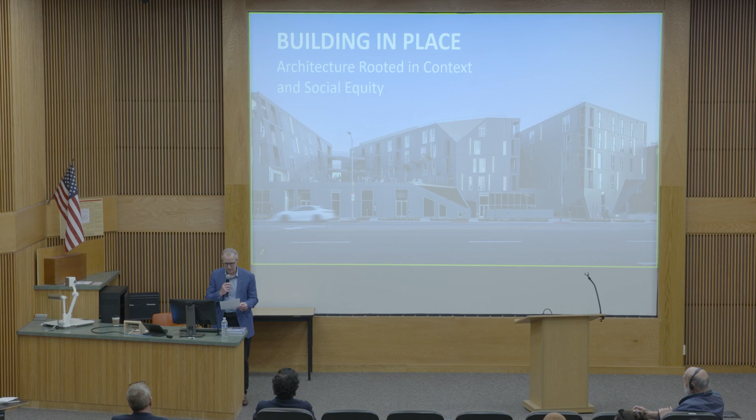We can talk about the firm's many accolades and design awards, including being ranked number one design firm of the country by Architect Magazine's Architect 50, and Lorcan's the founding principal of LOHA, and named AIA Los Angeles Gold Medal recipient. So these public notices are evidence of something much more meaningful in the work of Lorcan and the firm. In the firm's recent book that I just showed, titled Building in Place, Architecture Rooted in Context and Social Equity, the book's introduction explains the firm's approach.

I really like this excerpt, so I'm going to read it. Architecture is telling a story. It is about specific lives and specific places, the exact location where people work and play and carry out their daily routines, whether uplifting and inspiring or enervating and mind-numbing.

The stories - this is my editorial comment - and the work of the firm, is about redlining in South Los Angeles, and the continuous renewal in the cultural and artistic melting pot of Silver Lake. They are about embracing the pessimism and economic struggles of Brush Park, in the collapsed ruins of Detroit. They are about implanting something brand new, housing for the unhoused, on a railway median, beneath one of the world's largest freeway overpasses, where there was no hope of life before. They are about percolating waters of a timeless American Indian oasis, hiding in the rush hour streets of a blithely unknowing metropolis.

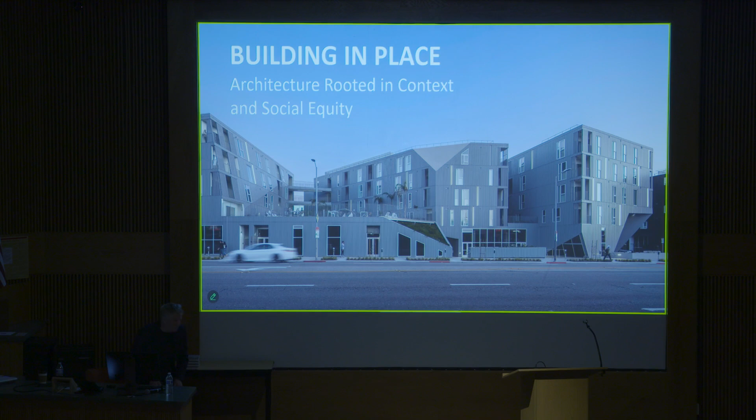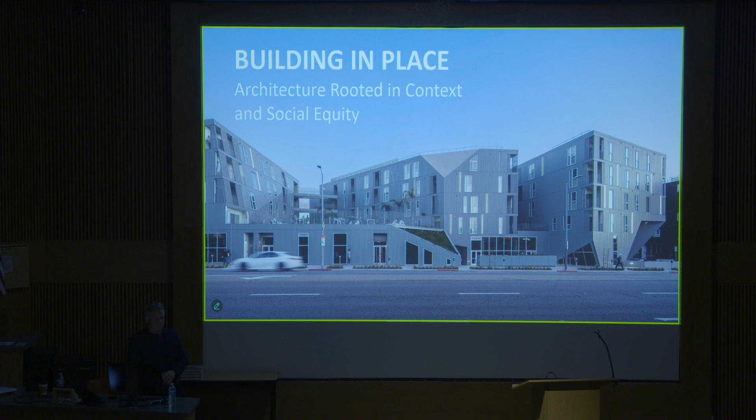You mentioned a very good point about the nature and the importance of housing as a pedagogical strategy. As an architect, one wants to think of why, or the philosophy behind what you do. My background is that I studied undergrad in California, and I went to London to the AA to get my master's degree. It's interesting, wherever you go in this world, if you look at the history of architecture, certainly in Europe, housing is how one defines cities. And when they try to understand the DNA of cities, they look at housing. Thus Corbu, among others, in the early years, and Hilberseimer and all these wonderful architects from Europe were defining what cities were. It's something I think the US is going to get to as well.

To me, it means a lot to be involved with housing to the degree that I am. We as a practice are about 25 of us. It's a team, and I'm honored to have great core people in my practice. My role right now is to continue to carry the DNA of what we've done over the years, and to see architecture as a culture of redefining how people should live. I'm convinced and committed to the culture of people.

Part of my background is at I. M. Pei & Partners and Steven Holl's, among others, which is where I spent my internships, well, I'm sure all of you students will end up spending places as well in the future. Certainly not I. M. Pei, forgive me, but others. That experience meant a lot to me, and it was learning from those architects.

But one thing that resonates with me is having worked on the Louvre Museum for 4 years, and certainly with Steven Holl, worked with cultural projects, I always thought I was fated to get involved with cultural projects as a practitioner. Ultimately it found its way into housing, and I've recognized the value of the culture of people, and that is what housing is about. It's about those who live in it.

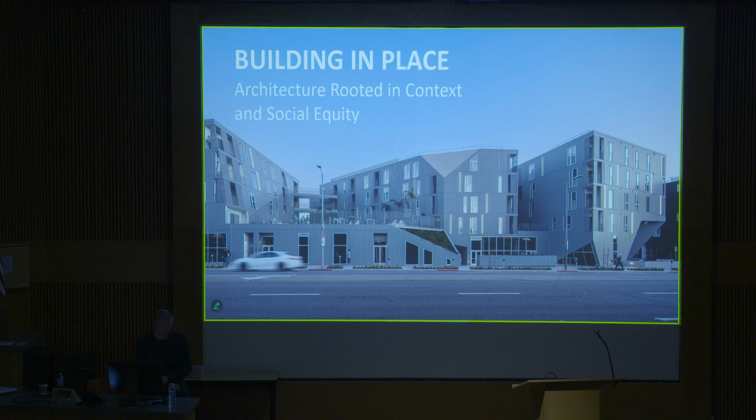That's very important. So today we're just going to present projects from my new book by Rizzoli, Building in Place: Architecture Rooted in Context and Social Equity. What the book does, and what my firm does, is draw out impact solutions and strategies which demonstrate our commitment to artistry, social equity, and context, in the hope that we can elevate the human condition. Those are all critical points. It's about context, it's about understanding where it is, and that's extremely important in terms of all the work that we do.

Just from early part of this lecture, I want to explain what the title means to me. Building in Place, the title of the book, reflects on the work in the new volume.

There's an intentional double entendre here. If you take the word building as a verb, as in to construct an edifice, to fabricate from scratch, to raise something from the ground up, all these represent that term building. It also refers to the noun, as in building, a structure.

Place, too, has multiple meanings, as in to put something somewhere, such as to place an object on a table or a building on a plot of land. Then there's another meaning, as in some place, somewhere, a specific location, with a deeper, subtle connotation, implying a spot with a very specific history, culture, identity, tone, vibe—call it what you will—but alive with the beat of its own existence.

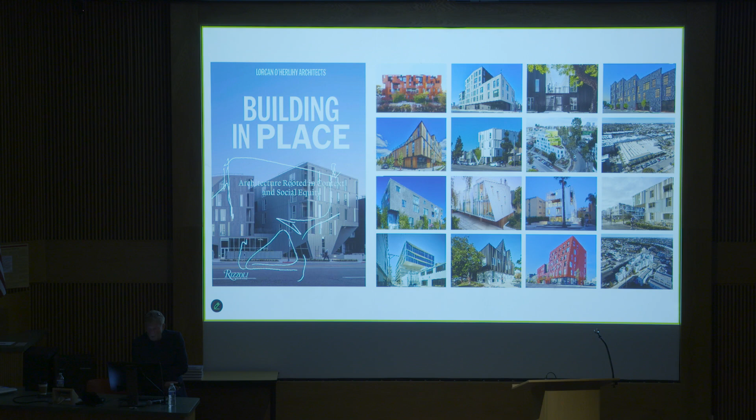And that's what the book is about. It's about both context and place, and also about this thing that we do, which is producing architecture. We build in place. When we're fortunate and successful, architecture evolves, and that's what drives our work. The title was something that meant a lot to me; that was the premise behind Building in Place.

I'm going to share with you four housing projects, two of which are supportive housing, one a co-living project, and in addition, a dance school. I wanted to show that last project too, because it shows that all the ideas we develop in these housing typologies can also be transitioned to other types of projects and typologies, such as a dance school.

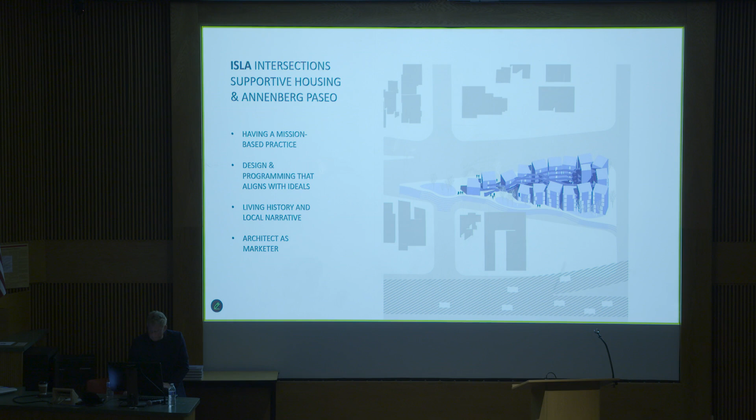Isla Intersections Supportive Housing and Annenberg Paseo is a project in South Los Angeles. This embodies what I mean when I say living histories of a site. It is very site-specific, this project, and there's a critical story behind it.

It's a median between two roads, as you can see right here. This is the site, located between Broadway and Athens Way. These were two roads that had existed, and this was a shortcut to get onto the freeway—the confluence of the 110 and 105 freeways in Los Angeles, which is the busiest confluence of two freeways in the United States.

So one can well imagine, not a site to do housing. Los Angeles is struggling, needless to say, with providing sites for housing. The land value has gone through the roof, so these types of projects and sites are the only ones remaining right now. What are these leftover spaces, whether it's a median in a wedge shape or other types of medians?

How it works is the city provides the land for 99 years for $1. Thus, the land is free.

The second critical aspect of this project, which always undermines other types of supportive housing projects, is the need for parking. What's wonderful about this project was that parking was not required—that was built into the request for qualifications for those who chose to pursue it. That saves $2 to $3 million, due to the cost of a concrete structure for parking, then putting housing above it with the required 3-hour fire rating. That's $2 to $3 million off the table, which is wonderful.

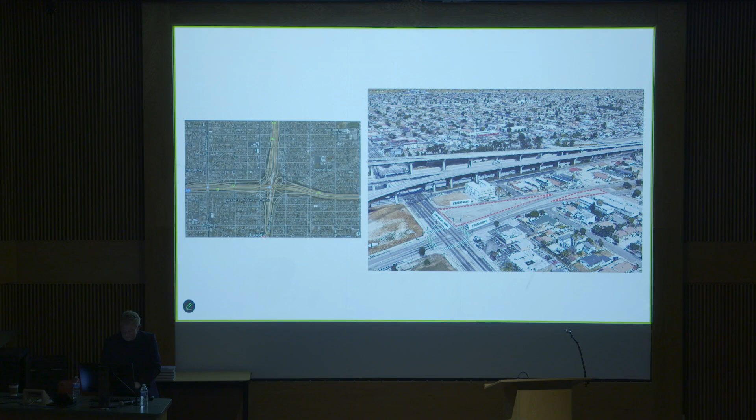It is organized along the spine of Broadway Street as a series of 16 staggered containers, boxes, connected by a series of walkways to create a single unified building. So here you can begin to see that represents the floor plan. This is the site, and then there's the circulation right down the middle. So those are the big ideas behind it.

The programming includes gardens, space for the farmer's market, a small lab for startup testing, the making and selling of goods. Programming was also critical in terms of healthy eating, so we provide an urban farm on the site as well. A big challenge was we had to design it in a very compact and efficient way for each of these containers. The open plan certainly allowed for the idea of a kitchen, bathroom, bedroom as an open plan. So that was one of the key issues there.

There's an axonometric, so it was connected by a series of walkways to create a single unified building, intentionally scattered along the inside. Here you begin to see we designed it with this idea of circulation and exterior access. This was crucial as well in terms of providing passive design strategies. Can people enter from outside? Certainly you can in Los Angeles. So that represented a very important aspect of the design.

Equally, we did provide rooftop farms. All this is part of the urban farm. Community terraces. This particular road, called Athens Way, a secondary street in Los Angeles, was vacated. It became, in a sense, a pocket park. So this became the front lawn for the tenants who live in the building, but also was open to the community. So this is an open park now, which has been finished for about a year. So all the landscaping is growing.

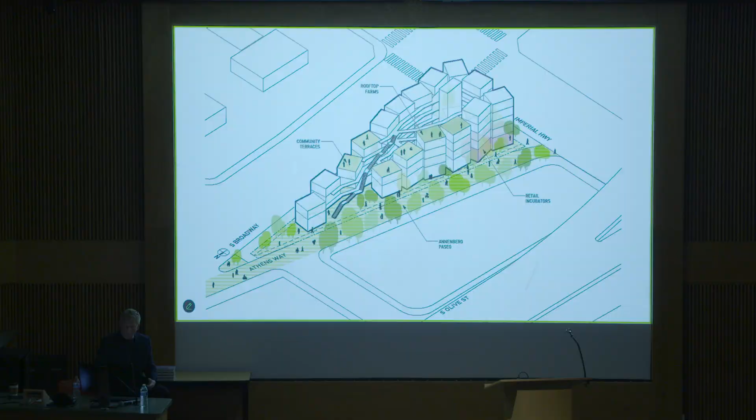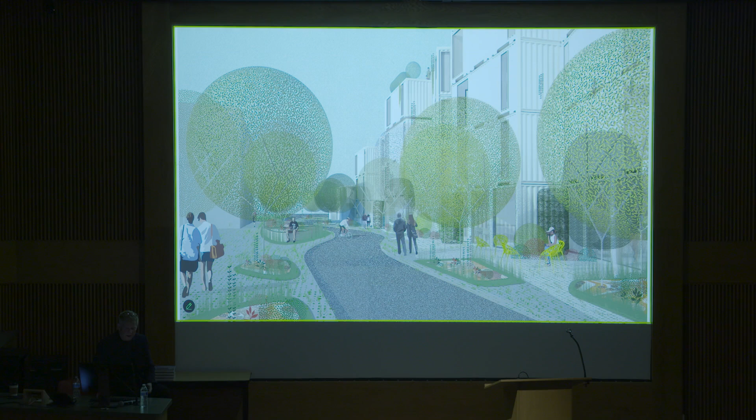Ideally, we'll have more and more electric cars, and ideally the toxins will be reduced both in terms of health and also in terms of sound. That's our hope. There's an early rendering of the project. And there's, again, the development of the paseo, which was a very important aspect because you see it's no longer a road. It's essentially a bicycle path, which is also about establishing a new culture in Los Angeles to reduce the need for cars and begin to recognize other ways of transportation.

This is the context, and this is what we were dealing with in terms of adjacencies, as you can see. Culture of Los Angeles, as they say.

This represents, of course, the big idea behind working with containers: as we go through design and approvals, we can start at the factory to fabricate the units while we're doing the grading, preparation, and foundations. So all this is going on while we're building it. Then they ship the containers and install them. Clearly it took longer than 3 days, but in the end, this is the premise behind it.

So we were able to do it in about 12 days to bring all the containers, and then it took a number of months to zip it up, and then the landscaping was certainly added to it. The premise behind it was we would save over a year between all the fabrication during this period. It turned out to be more like 7 months rather than a year. But while we're doing all that, we saved time, and time is money. So that was the idea behind it.

So it is, in principle, meant to save time. And as I said, it's an opportunity that one should grab.

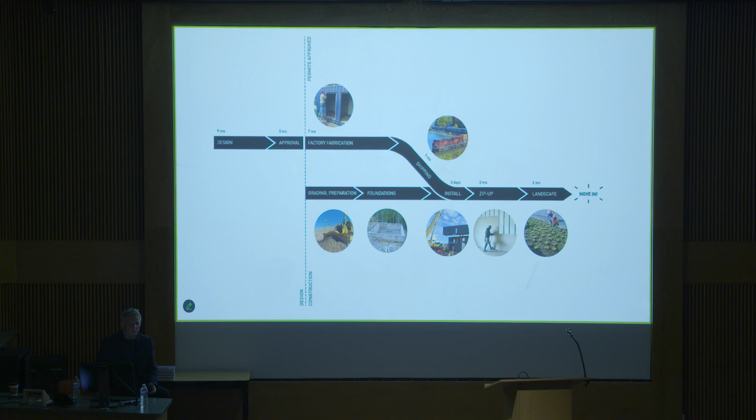Having done it, I'm not convinced it really works. There are some of these container vendors - this was with giant containers, and there's other ones called plant prefab. They take much longer than they say they're going to take, so you don't have the value of saving time. That's something we learned having done it. It sounds great, sounds noble, but it's very difficult to pull off.

So here are the containers being brought to the site. What's interesting also is the containers that worked on the site, because it's very difficult to have a staging ground. We had it right in between two streets, a very busy area and a confluence of freeways and an urban site. So it made sense to build it in a factory, so there wasn't the complexities of building on site.

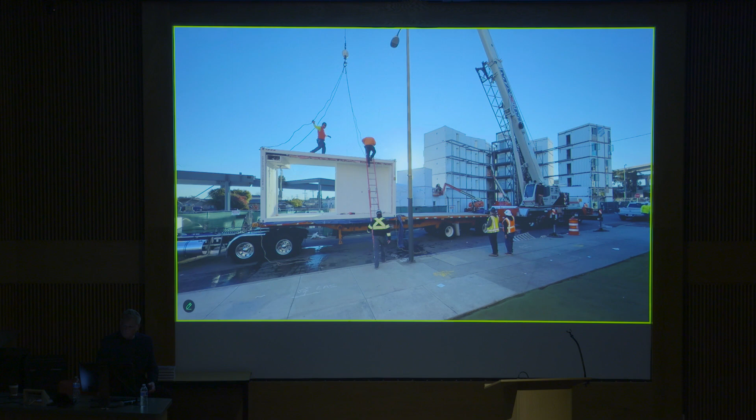Given the political aspects of it, it was nice that the city council person was committed to the idea. What's interesting is that when it was completed, there was a very important moment where the city embraced it - there was a grand opening after it was opened. It was wonderful to see the community come out and see the project, providing 54 units for supportive housing for those who are on the street, the unhoused. I'm very happy to say that's fully leased, and they're very happy to be there.

This, I think, is the future for Los Angeles. The land value is so much that they have to find these pockets of leftover spaces in the city and utilize those spaces to be able to provide housing as needed. There are over 67,000 unhoused in the streets of the County of Los Angeles right now.

There's a bird's eye view of the project, as you can see. The Paseo really celebrates this idea of a front lawn, so to speak, which embraces a new culture - which I do think is important in Los Angeles - to get away from the culture of the car and embrace the idea of bicycles and walking. So that plays a big role.

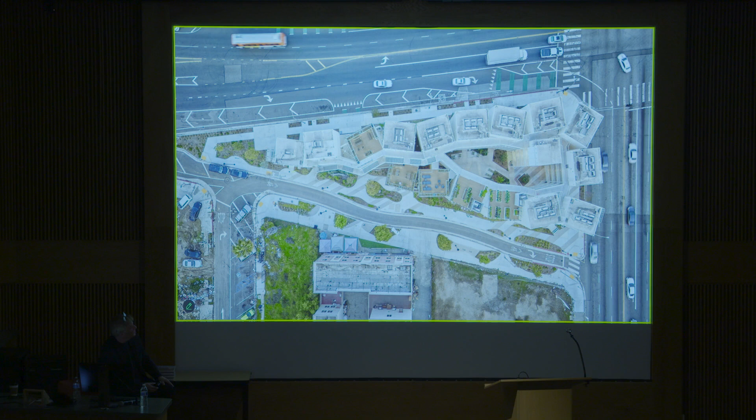I quite like this picture because it shows the intensity of this urban condition where the streets - you can see the cars, you can see the kind of distressed buildings around it. We do think this is going to represent a catalyst for change in the area. This was a no-go zone. There was a food desert - there was no food there, nothing was there. So for us to be able to build this and provide 54 units, it meant a lot to us.

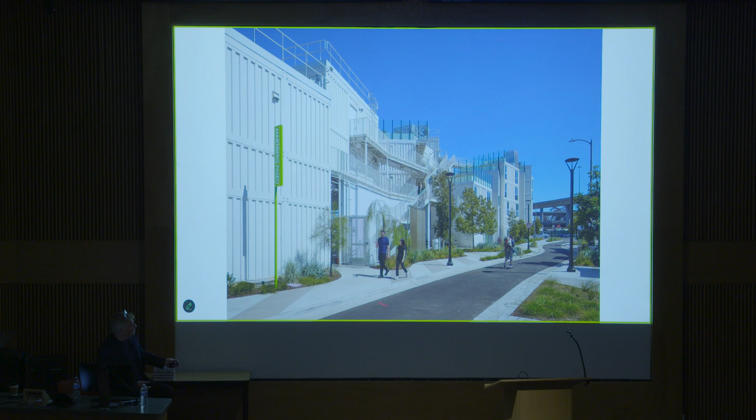You begin to see the trees being planted - these will grow to be 35 feet tall. This is the wonderful area that is now their front lawn. As you go up in the building, as I mentioned, the circulation is in the central spine, and these are the outdoor spaces. We're activating each roof as an outdoor area to sit. For those who've spent multiple years on the streets, they really enjoy having these spaces to go in and hang out.

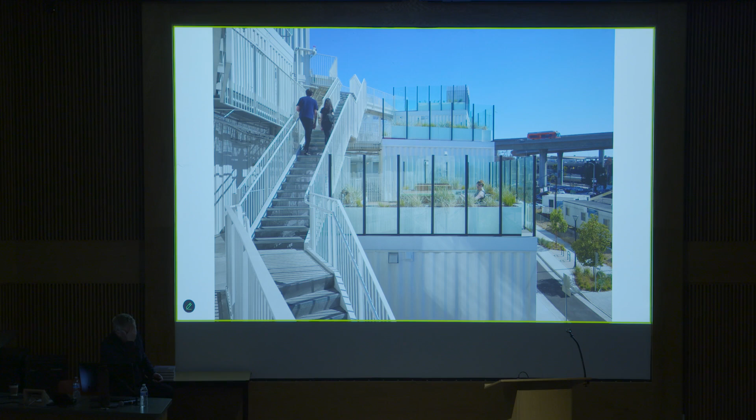On the roof, we have the urban farm, as I mentioned. This has been run by an urban farm company, and they come in and maintain it, making sure the food is done well - all the vegetables and fruit planted here. This is for the people in the building, but also on weekends they can sell it at the farmer's market, and that's what the Paseo will be used for. There's the courtyard view of it there. So it's really about the ecology of where it's located.

This particular project was in a very, very challenged area, so we wanted to give them the opportunity to have some privacy and security in a courtyard. All the individuals who live in the units have an individual way of joining their units and the entry doors, yet you can see the intimacy of a courtyard down below. So there's an opportunity for them to start this process of re-engaging society by having to recognize your neighbor, and that's awfully important to providing this experience for them.

I'm often asked about container buildings. Do they look like a container inside? No, they don't. You have to create a conditioned space, with insulation, and make sure it's a comfortable place to live.

So these are very small areas. They're 420 square feet, forgive me, more than that. The 3 containers are 8 by 20, which is 160 square feet each, times 3, which is 480. So 3 containers represent 1 unit, each 480 square feet, and that represents a room for a kitchen.

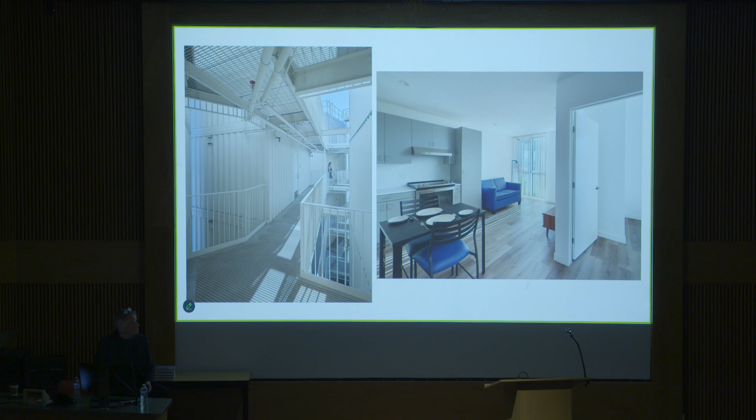Here are all the container towers. As I mentioned, this is 3 containers representing 480 square feet.

On the ground level here, they were startup companies, we call them incubators. Each one of these are organizations that live in South Los Angeles, one is the food resources area, another is job training. It's very specific to those in the building, both an incubator and also the idea of health is very important. So both food and social services, very important.

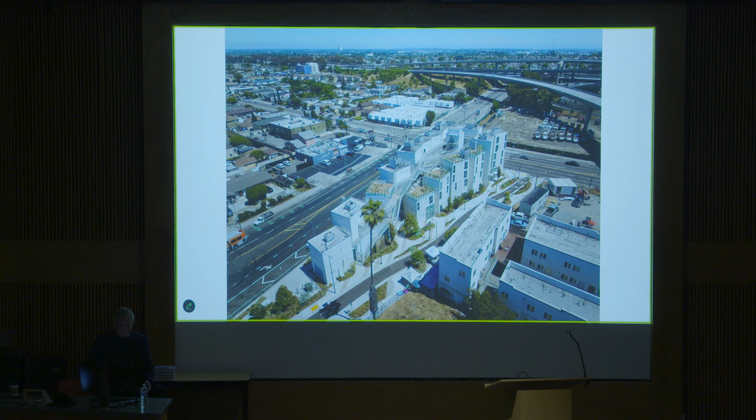And there's a view on the busy streets, that's Imperial. Again, compositionally, architecturally, the idea was to take a conventional container building—they tend to be stacked right next to each other, all about efficiency—but no, you can actually be playful with it. So what we ended up doing is playing with the geometries and shifting the axes of each of the container volumes.

It was twofold. One was, if you shift the geometry of a building, the sound from the freeway, which is critical, bounces off differently than if you had a flat wall. So we didn't want a flush condition facade because the sound was going to echo. But if you peel it apart and provide air spaces in between, it absorbs some of the sound so it's not as loud. It was really interesting to use noise as a kind of catalyst for the actual massing of the building.

And that's what I believe in. When you're doing projects as an architect, you look for opportunities to produce good architecture, good ideas, and it sometimes comes from that. It's about sitting down with your noise consultant, and he says, well, we shouldn't have a flat wall. Ideal, wonderful, like it. Let's shift the geometries. So that to me is the way that good architecture comes out of it.

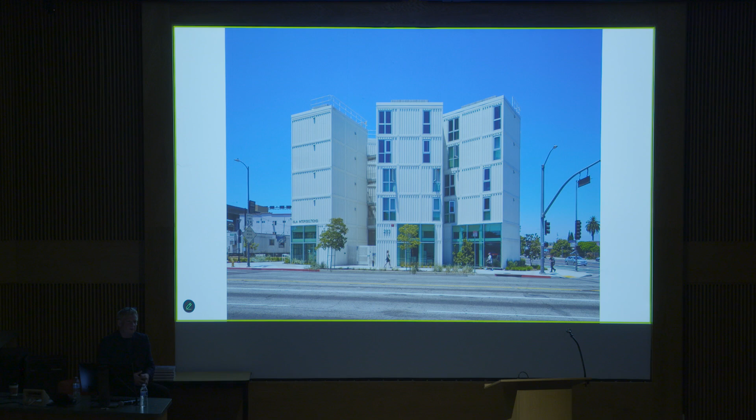And there's the main street. As you can see, each building is shifted, or a tower, and you can see the light filtering through to the courtyard.

Contextually, you can see it fits there. It's near the freeway, it's industrial, it's urban, and the building can be representative that way. We like the color white because light bounces off it differently than other colors, and it's also optimistic.

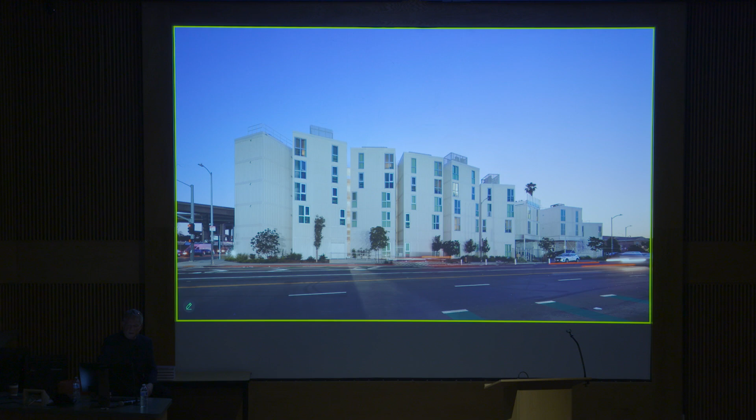So that's called ISLA Intersections. We finished it about 10 months ago to a year ago. The next project is also supportive housing, and this is called MLK 1101.

So it brings 26 units of permanent supportive housing to formerly homeless veterans and chronically homeless families. This building has 26 units, but has 3 bedrooms, because at this particular time, 6 or 7 years ago, there were quite a few families on the streets of Los Angeles. The breadwinner, perhaps the husband or the wife, lost their job, and then they eventually found themselves in a car and then ultimately on the street. But they were family, so this building was for them.

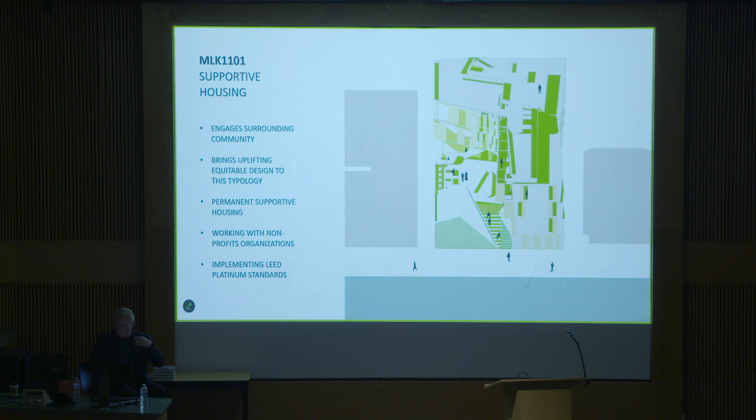Out of the 26 units, over 22 were 3-bedroom, for families that were on the street. That was one of the critical things. Equally so, they were veteran families as well. So those are the things that drove it in terms of the programming.

As I mentioned, at present there are close to 70,000 people experiencing homelessness in the streets of Los Angeles. And given the need for housing in Los Angeles, now we have another 10 or 15,000 people who lost their homes in the fires, the Palisades fire and the Altadena fire, this is even more critical to be able to provide housing for all.

There were a number of people in those fires in areas that were nice, but they were houses built in the 1940s and 50s. It had been in their families for many, many years. They don't have the resources to rebuild. They're going to need to move elsewhere because of the drama and the sense of fear they have about being able to rebuild where they were. So this idea that housing is so essential is even more true now.

It's also located in South Los Angeles, needless to say, one of the city's poorest neighborhoods, where 33% of the population has an income below the poverty line. That's the market we're dealing with, that's the critical thing we're dealing with, and a college graduation rate of 4%.

So you can see these are areas that need work of consequence produced. It was a vacant, unimproved lot, typical to most parts of the city of LA, next to a McDonald's, a strip mall, and a hodgepodge of rundown 2-story structures, as you can see.

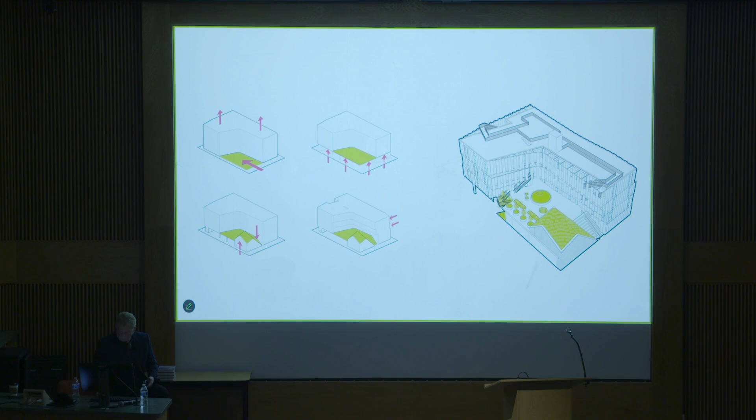So you can see that section. It speaks volumes of what we're doing in our building, carving out these strategic voids, providing light, air, and circulation, activating them - all those aspects, which I spoke briefly about earlier to some students. That produces good architecture, gives you opportunities to work with the massing and produce architecturally interesting forms as well, if it's driven by ideas like this.

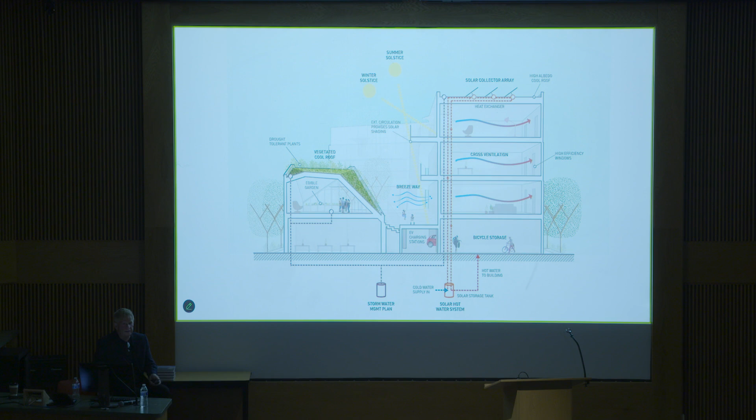And that was an interesting moment because one of the state federal funding sources we had requested asked, can we do a green roof? And we said, absolutely. All those things came from actually the vendors who are the funding sources. So it's quite interesting that even as they're providing the funding, there are mandates that come with it. We'll give you $1.5 million towards this building, but we'd like to have a sustainable component to it. Can we do a vegetated roof? And we said, absolutely.

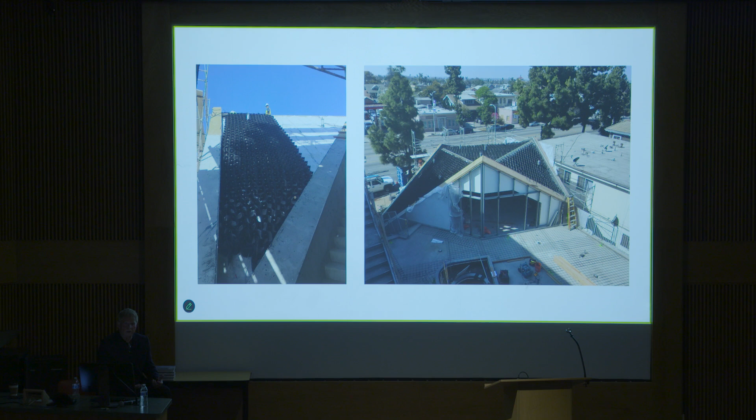So architecture is a collective way of assembling ideas, and they come from everywhere. And if you just listen, you can hear them. And it produces better work. More construction shots, and there's the completed work.

So this is the main axis down the center. We did produce a moment here, which is called a stoop, meaning we pushed the security gate, which you do have to have, up to the end here. We didn't put it down here on the street.

Thus, if you're on the street and you don't have a place to live, and you're homeless, you can come up here and sit during the day. It's open 24 hours a day. So it's a generosity of the building saying this is for you as well. And that goes a long way in terms of respect for the building. There was no vandalism. There's no graffiti.

That one gesture, in a sense, proved to the community, which is a distressed area, that we're going to give you this - in return, let's respect our neighbors. And thus there was not a conflict in the building. Everyone seems to be enjoying it.

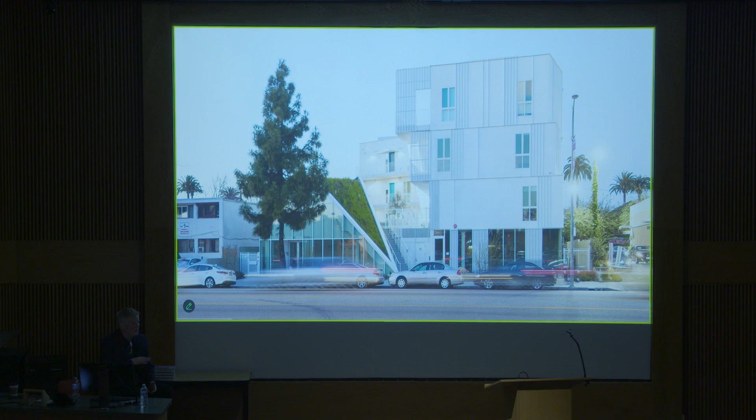It's called permanent supportive housing. And the most important word is permanent, meaning if you have the opportunity to move in here, you can stay here for the rest of your life if you stick to the rules: see your social service representative, no drugs or alcohol, and be kind to your neighbors. If you do those three, you can stay there indefinitely - thus the term permanent supportive housing.

Circulation on all three levels, you access from the exterior. Shading, where we were able to provide shading at the top. But also the materiality of this project is a hybrid between metal exterior and cement board, which was a requirement by one of the funding sources. They wanted multiple materials. We did that, but we kept the building all white. We didn't want to have this hodgepodge of different materials that somehow break up the scale, which is what they did it for. I was convinced that you don't need to do that. You can change the material but have a clarity of an idea. Thus the overall idea of the white building, which to me represents optimism.

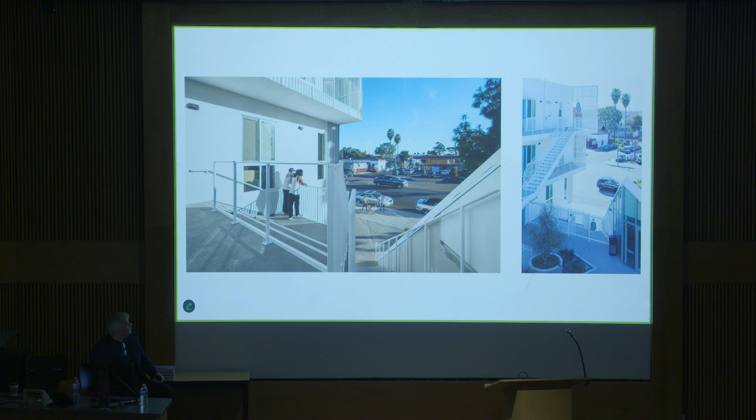And there's the stoop right there.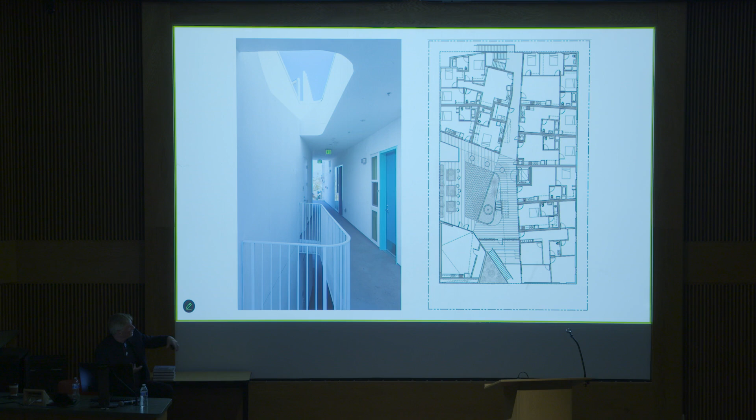Here's a typical plan. You come up the stairs, and at each level you can see the bedrooms. Here's a smaller one-bedroom unit, here's a three-bedroom with one, two, three rooms, and here's another with one, two... sorry, that looks to be two bedrooms—three bedrooms, forgive me. You can see they were able to stitch and weave the three bedrooms around the courtyard.

View from the walkway above, looking down. And then again, a typical unit—this one we flush the windows at the ground, and we also have 9-foot, 6-inch ceilings. Again, simple, not big budgets.

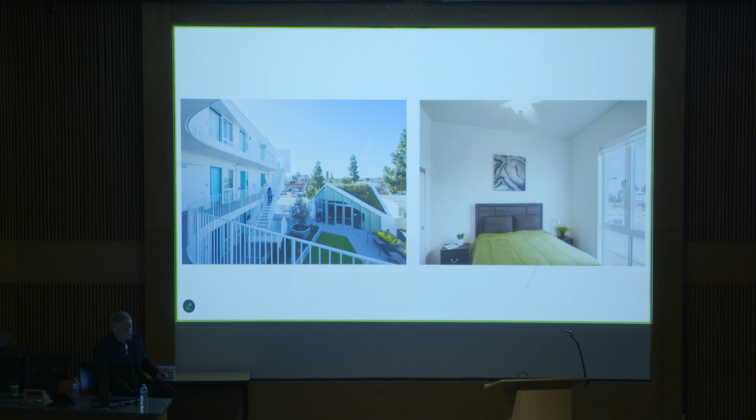That's part of the thing about architecture—you can use architecture to make lives better, meaning that if they can begin to assimilate in culture again and be able to engage and communicate with people, the better.

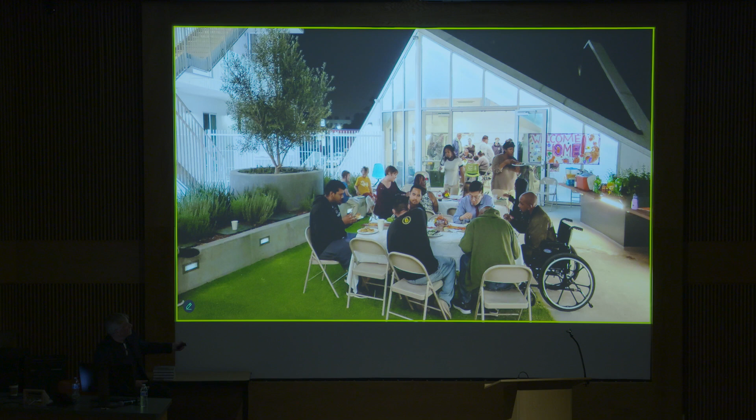This represents how active this courtyard is. We've also done an urban farm here, with vegetables being grown right there. And this is the multi-purpose space—a community room, kitchen, among other things. There's a bird's eye view of the outdoor living room.

You can see you can produce and bring architecture to supportive housing—there isn't a mandate that it has to be lacking of that. Early on in our career with these projects, you'd have that condition where the client would say, look, we just want to provide homes. We don't care about the architecture. We don't care if it's uplifting. Just make sure they have shelter.

Our position is, well, it's also about their health. And their health is to have uplifting spaces.

I believe that passive design strategy is critical. Thus, we had all the exterior access to these. There was a moment in this project where they said, why can't we just have a box with a double-loaded corridor down the middle, because that's a conditioned space? But that's not a very pleasant world when you have hallways in the middle of housing. If you can pull the housing, or the circulation, to the outside and have access from the exterior, that works—and certainly can with the climate in Los Angeles.

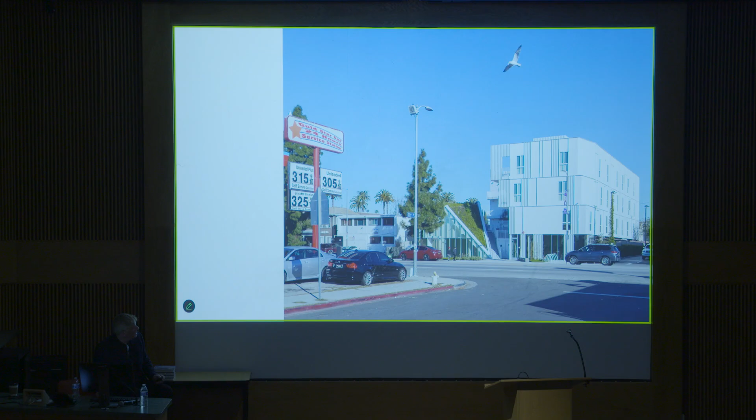A view of the street. I like this also because you can see there was, once upon a time, gas priced at that number. But you can begin to see how the entry has this opportunity, this optimism of the street. This building certainly elevates the architecture of the street compared to the conventional buildings on the rest of the block. And there's USC over there—you can see the Coliseum.

The next one is market rate—a project I did about 15 years ago. It still represents an important moment in our career, a bit of a tipping point. It's called Formosa 1140. Again, the big idea was providing green space and density simultaneously—can you produce green space and housing on the same site? This was critical because it was a public-private partnership, a weaving of both the City of West Hollywood and our private developer, Archetype, the development company.

The third idea was really looking at amplified urbanism—can you produce architecture that's not only producing housing, but also brings a pocket park to the same property? A very unusual concept. I'll briefly explain the background: it's in West Hollywood, a very interesting, progressive city with a very dense horizontal density. Most of the work is 3-to-4-story apartment buildings with smaller houses tucked throughout the city. LA is notorious for lacking public space, so the principal idea behind this project was to radically rethink that convention.

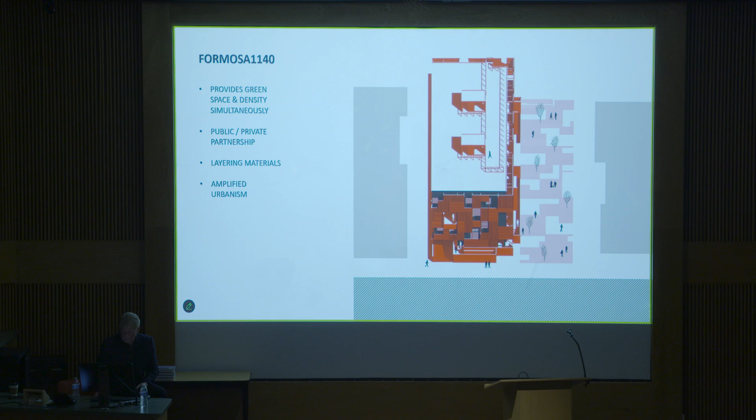Well, it couldn't work. So we came back to them and said, what if we provide a pocket park for the city that anyone can use from 7 a.m. to sundown? They bought the idea, and said okay, you can get rid of the house, build your 11 units, and we can actually provide $500,000 to do the park.

So in a sense, we are trying to rethink the convention of the courtyard housing you see throughout Los Angeles and elsewhere. There's your conventional courtyard housing. Thus, the courtyard housing block infill ends up like this, where all the common open space is only for those in the building.

But what if you were to do a modified courtyard strategy, an extroverted concept, where instead of enclosed common open spaces, you push the volume to one side and provide a pocket park, overlaying the common open space requirements of housing with a public park for the community? And that's what we're able to do.

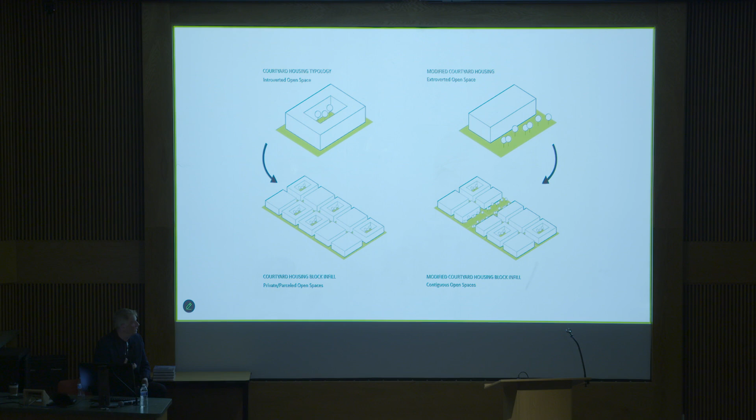You don't have to stick with the urban strategy, the urban grid, all predicated by cars. What if you were to rethink the city for the person, for people to walk? That was the premise behind it.

So here's the big building. In terms of efficiency, all the units are identical—there's 10 units here, this one's a little different on the corner—and then here's your pocket park. So this is one property, but it's a public park and private land. And there's the section, meaning there's your park, the parking tucked underneath the park, and there's your building right there. That's an interesting concept of public-private.

This, in effect, is also a property line between the public and the private. So as a vertical section, you have private parking underneath for the tenants, and a public park on top of it.

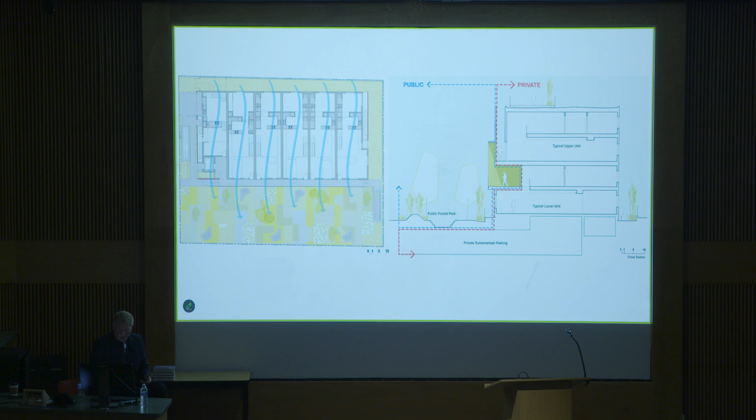There has to be an alternative approach right now. With climate change and the intensity of the winds and fires, which are tenfold compared to 20, 30 years ago, they are wiping out cities. There are war zones in Los Angeles right now, in Altadena, Palisades, and elsewhere, and this will continue—in 2 to 3 months the same thing will happen, and 3 to 6 months after that, another scenario will happen. This idea of repeated disasters is going to keep coming.

So there is a way that individuals like architects, working with clients, can produce fire-resistant houses. That means wood may not be on the table anymore, because, by Lord, that is fuel for the fire.

Equally so, the state and local government have to engage, and the infrastructure also has to address it. They have to recognize that between the brush, which surrounds all of Los Angeles, and where all the houses are, that's the edge condition—there has to be a firewall. They have to produce a really robust, accurate way of handling that, and they have to have infrastructure in place to mitigate these fires when they start, because once it takes over, it's a war zone.

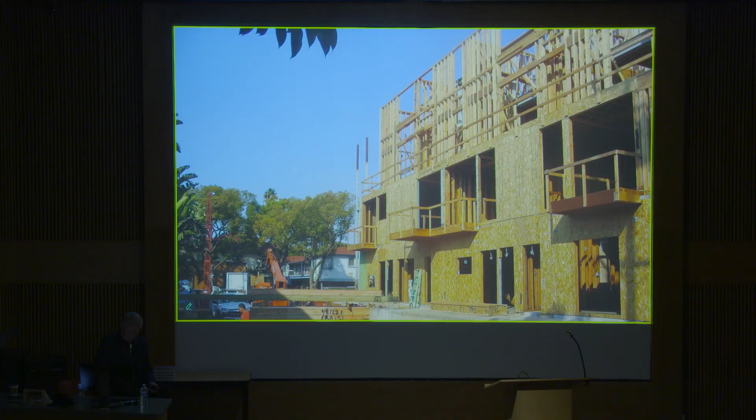Not sure if it's going to be wood frame construction for years to come, but this is what we do in our practice: we find where the idea is. The idea in this project was choreographing the facade. We were very careful about how we could produce a building where, given the efficiency of all the units, we elevated the design by virtue of the materiality, the off-the-shelf decision to use metal, and with regards to the cuts and openings where you have views from inside out. So where the patios are, you had to make sure you could look out. The walkways up here—each one of these perforated metal and open spaces were carefully calibrated from inside out.

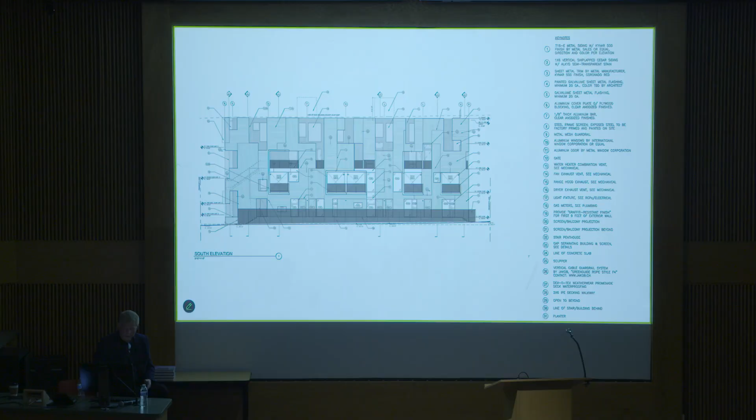We went up on the scaffolding with the client and looked out. We started to develop the balance between where you look through and see, and what are the solid panels.

I like this project because it proves that it has an urban strategy. You've got this pocket park on private land. These 11 owners own this land, but it's run by the city. How nice to be able to look out at a park and not another building 5 feet away. What's nice is the building on the other side where we're taking this picture looks out at a park, and equally the building on the right-hand side looks at a park. So this one move solved so many urban issues, meaning there were no green spaces in Los Angeles, the least amount in the United States.

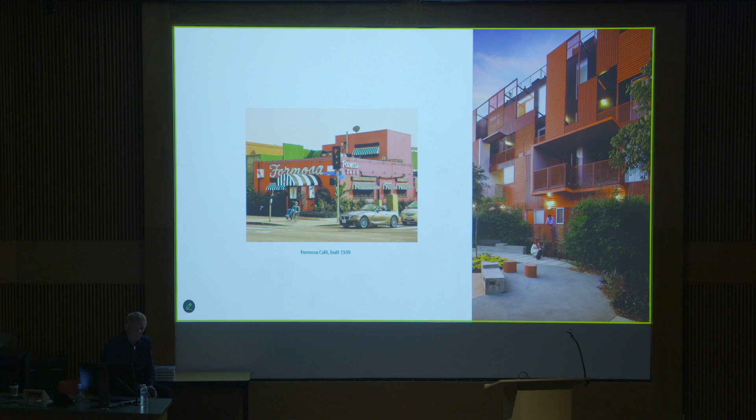I want to talk about context in Los Angeles. Context is where you find it. In this particular project, the Formosa Cafe, down the street, is actually a cafe my dad, who was a film actor, used to hang out at with Orson Welles—he was part of the Mercury Theater in the 40s and 50s. So I thought the opportunity was there, since Formosa Cafe was half a block from the site. I said, okay, I'm going to have a personal connection.

So I went to my client and said, can we use the context of color for our building? This was our third project with this client. He said, well, we did 2 others and we were able to lease it well. Yes, we'll find 11 owners who can live in a red and orange building. And they certainly did—some of those owners are still there. So it was that moment of opportunity for me on the third project. I'm not sure I would have been able to get away with this color strategy if it was our first project with that client, but because we were successful in the other 2, he went with the idea.

So context—here's the park, there's the building. More details: all the vertical patterning of the metal was red, and the horizontals were orange.

This also represents, or goes back to, a period of 3 to 3.5 years. I lived in New York City after I worked on the Louvre project for 4 years, having been embedded in art through the Louvre, although it was Greek and Roman antiquities at that particular museum. I wanted to be an artist, so I stepped away, crossing boundaries to be a painter.

During that period, I was very deeply immersed in painting, impasto techniques, glazing techniques, really understanding the tools of painting. Compositionally, I felt my eye was refined by being a painter. So when I then ran out of money and couldn't get shows, I went back to architecture, crossed boundaries back.

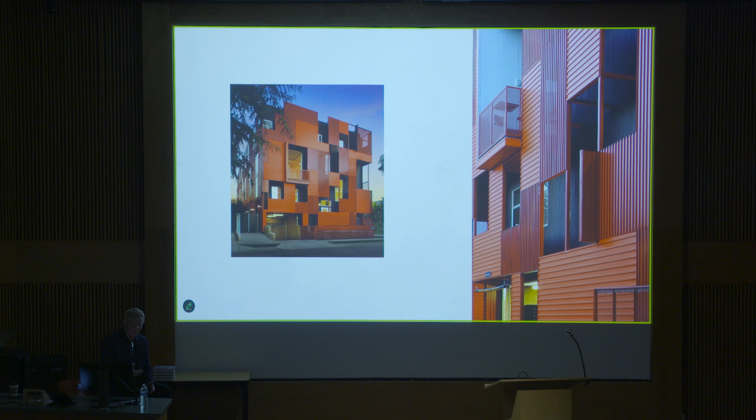And then embraced architecture and its tools, which is fabrication and building. So this is what we ended up doing. But I brought, I believe, an eye to be able to look at buildings and do things that are a little bit unexpected, for want of a better word. How can we produce an architecture that's fresh, that's not typical? I hate typical. So we've tried to do that, and this building represents what we did.

Plan, very simple, but again, looking at plans. Entry, living room area, dining, through here to kitchen and a study, which is also a bedroom if it need be. So in a way it's like not a shotgun house, but it's a continuous linear building. Stairs that go upstairs, and then tucked in the kitchen here. You can open a window here and open windows here, and you have cross ventilation.

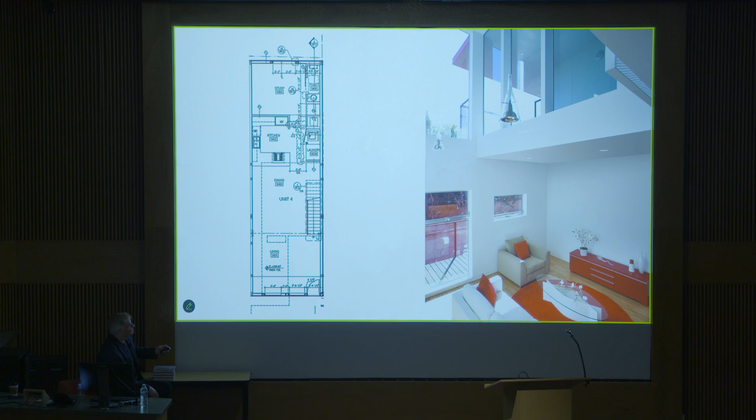There's a view on the second floor looking down to the living room. We do have the balconies and the units on the 3rd and 4th floor, as well as balconies. You can see the 1st and 2nd floors, you enter on the ground level, and the 2nd level is a balcony right here, so it's a bridge to it. As you come up the 2nd story, you have a bedroom, another bedroom, and then here's the balcony, private balcony here.

And this is the double height space we were just looking at a few moments ago, looking from up here, looking down.

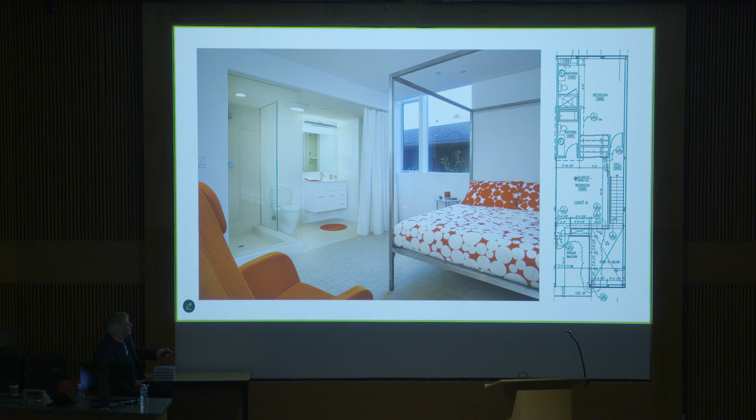A few more ideas in terms of the units is that some units, we gave them opportunities. I know this is a little bit out of the box, but sometimes an extension of the bedroom could be using the bathroom, so it doesn't feel like it's a walled off space, but it feels more generous. Ultimately, all the toilets were actually in enclosed spaces, so we didn't have them exposed there, but in the end some people were fine with it. There was a second strategy where the toilet was in this area and had its own door, but the extension of the room worked out quite well. The shower was exposed to the room.

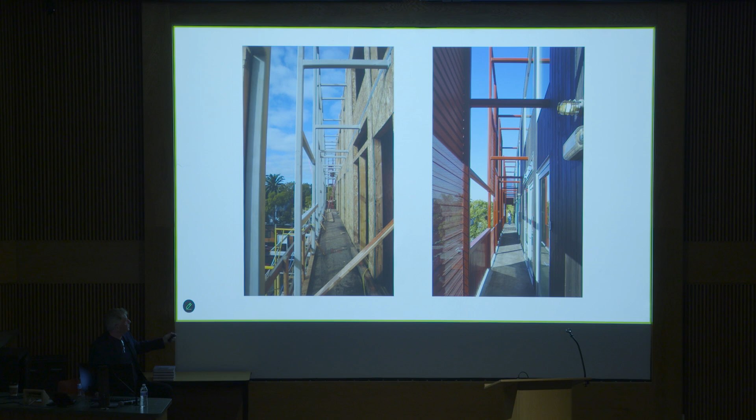Walkway here on the 3rd level. You can see under construction, steel frame, and then the skin right there, and there's the walkway.

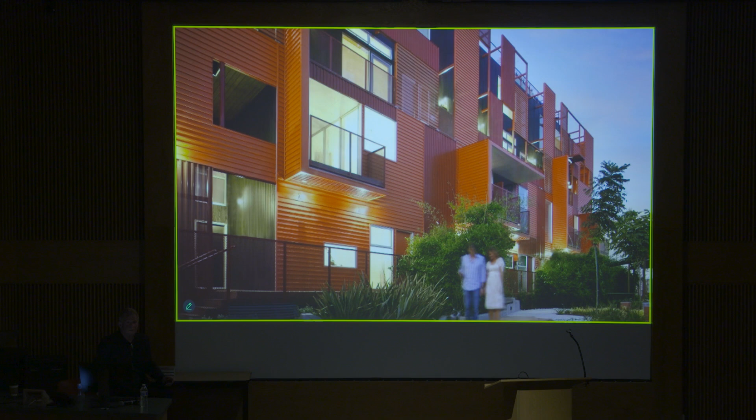In the end, is it possible in a city, through this idea of pocket parks, or the greening of the city—if that represents Formosa right there—what if there was a larger idea, a mandate, that as developers started to develop each individual site, there was a requirement to provide some green space? You can envision, just conceptually, holistically, to speculate that you could start to reinvent how you walk the city through parks. That's something I believe would be really interesting in the city.

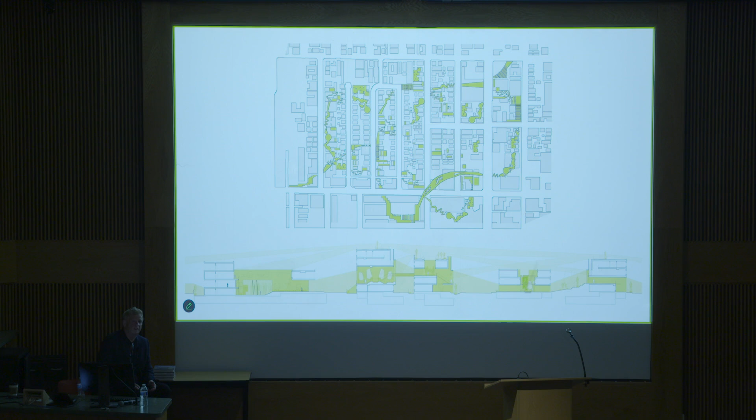Equally so, you could certainly do that, but also in section. If there's Formosa—well, actually no, this is my other project, Habitat 825, next to Schindler House—but if you have a building and all of a sudden this is public space, what if you had the opportunity to provide on a second level an open public space, bridging through sites like this? So it could be both in plan and section. You could have public realm stitched with the private realm in different ways. I'm convinced this would be a really interesting way of navigating the city as development comes and one starts to think about it in a more robust way. Very interesting if one could do that, to get away from the conventional and try for the unconventional. Formosa affords that. That gave me that idea.

Bit of some water here. We're nearly done. We have one more project, and then we're going to look at a dance school.

We just finished this project. It's a co-living project in West LA. It's student housing for UCLA in the end. Ultimately, that is housing for students, but it is open to anybody.

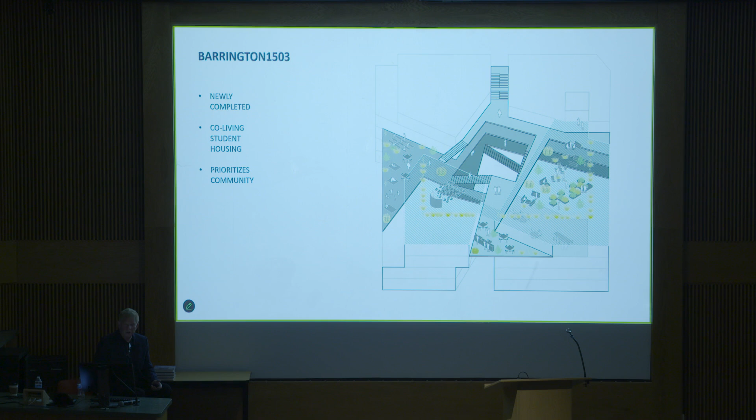So this is a project where we looked at co-living student housing, just recently completed, and it was really about prioritizing community. It brings 18 co-living units to West LA. Each unit has 4 to 5 bedrooms, totaling 79 total.

The second move was to open up the pedestrian access. Maybe we can modify the actual geometries of these openings. So it's not that the massing was modified, it was the circulation, the strategic voids that were manipulated. They were opened to provide more light in the courtyard, thus the units had a freshness to them. So it came from circulation, light. And if you use those as your mandate, then you can produce architecture that's a little bit different.

There's our massing of the building right there. So pedestrian access from two sides. This is the main thoroughfare over here. We actually did two housing projects over here for UCLA as well, so this is our third student housing project in West LA for UCLA.

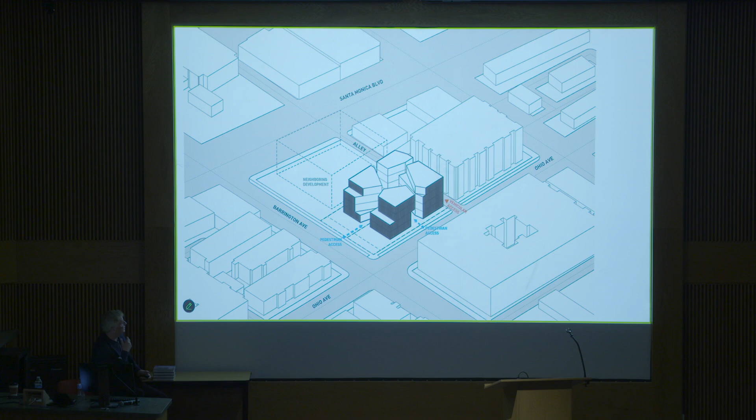Key to this development is, in a sense, a spatial social gradient. That's the thing that drove the project. So after you enter the complex, residents move through their shared private courtyards, and then they go vertical, meaning that as you enter the circulation spine, you come up a stair, and the first thing you experience is a study room, a living room for these units, dining, living, and game rooms.

So the premise behind it is a layered context where all the bedrooms, the privatized area, are around the perimeter, quite obviously having the windows and egress, among others. Then you have this layered aspect, which is the kitchens, bathrooms. And the third tier was the more public space, which extends outside. So the outdoor spaces become opportunities to bring and extend your living room, dining room outside. That idea is what we've done for many years, and we will continue.

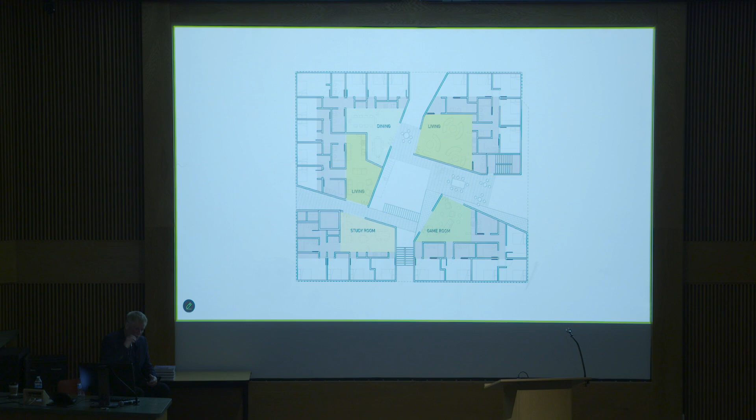But this idea is very interesting from a co-living aspect. Can you produce these types of projects? We have units with up to seven bedrooms in one unit, versus some that are like five. This idea that you can have individual bedrooms, three to four separate bathrooms, and then a study room or living room. So if you're here, you can certainly go over into the dining area. It's this idea that all the circulation, all the courtyards are activated, and that's what's really important for those who are doing courtyard projects. Bring program there, bring circulation, and that will bring it to life.

West LA is unique because it's in the center of the city, so you have this hybrid between urban culture and students. For them to live in this building is quite interesting because they'll meet other people—maybe someone in the medical profession, maybe architects living there. I think it's very interesting for students to have that opportunity. I believe it'll be 90 to 95% students from UCLA, but there will be other people who are open to it. Based on the Fair Housing Act, you can rent it to anybody.

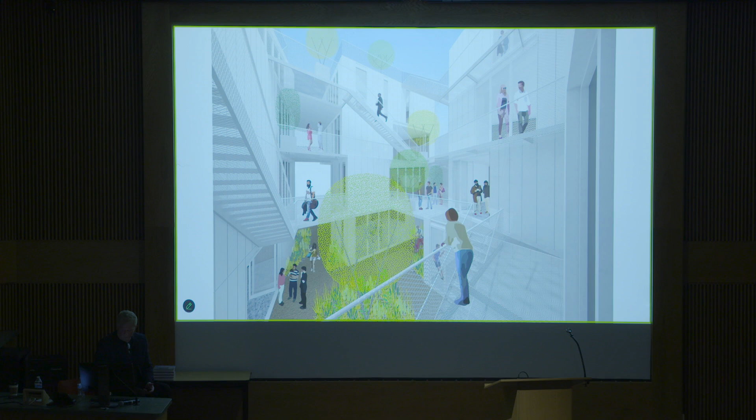But it is catering towards students, given the co-living concept. There's an early rendering of it.

I have to say something in terms of our graphics. About 10 years ago, part of perhaps my interest in art, I felt like drawings in themselves are an end product as well. Can you produce a drawing that in a sense pulls you in, that is a little bit more abstracted? If you really want to do a rendering that's very realistic, take a photograph.

But if you're doing a drawing, why not begin to rethink it? So this is a part of our strategy with regards to our graphics. It becomes a little bit more abstract, so we don't do realistic renderings. We believe drawings like these should be about the drawing itself and find something in it that interests you.

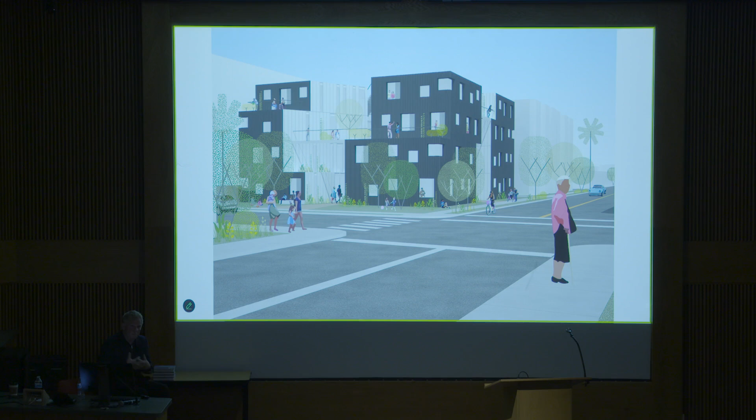Is that good? Good, I said something right. There we go. But that's very important, and I think that's important to realize. You cannot see that the premise behind drawings is just to do as realistic as possible. It's irrelevant. In my opinion, drawings are essential to be able to understand the soul of what you're trying to say. So it'll pull you in, and that's what's interesting if it's abstracted.

We have 6 different projects we're doing right now. Again, perimeter, singular, clarity of an idea, exterior, black metal, cuts in it, white, optimistic, courtyards, lighter.

It's like if you take an apple and you cut into it, it changes in terms of its materiality. The skin has that one idea, and then you cut into it, it has a secondary idea. It has an elevated quality to buildings when you think of it that way.

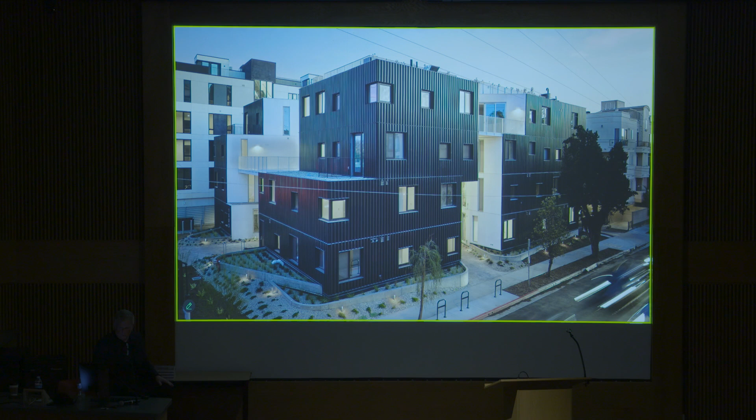But all of it is dealt with the actual in-between spaces, the circulation spaces, the spaces that you create to bring light into spaces. And that's what architecture is. It's not necessarily the volume, it's the in-between spaces that define the volumes, because it's driven by a good idea then. And this is what we're trying to do with this. That's a view towards the sky, inside.

And there's the courtyard again. Every single unit, big idea, big sliders, they can open out to here. There will be tables and chairs out here. We just finished it, so they really haven't furnished it yet.

I think it's very good for students, when they leave school, to go someplace where they also engage people. It's not great when you're in school and you go home and close your door and don't engage. But this is encouraging you to do it.

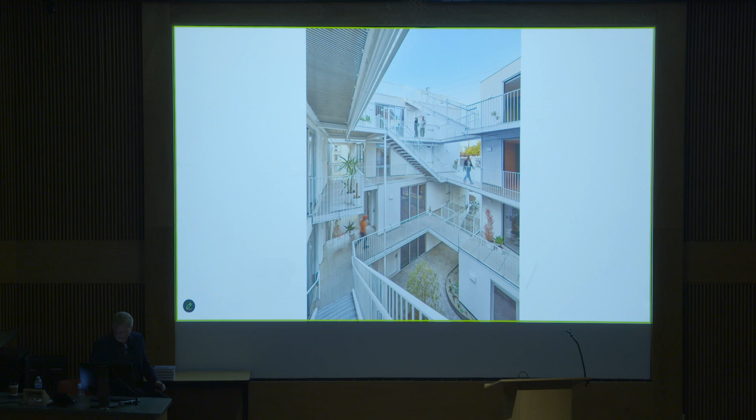Certainly the co-living concept works, but also this, which I call the outdoor living room area, represents places where they can go outside and hang out and talk to each other. Those look at the cuts there from the outside. So it's also open to the street.

But also compositionally, in a painterly way, if one looks at that elevation, you're playful with the windows. You've got this idea of black and white, which I think is really critical colors, equally so in terms of the red and orange. It has great value. And there's the units inside.

So we have this idea that all the circulation is black rubber, this darker gray, which is the connection, and then the kitchen and the bedrooms are the lighter wood, with access to exterior.

But again, all the materials here - this is just, in a way, Eurocolor plywood. So you can have off-the-shelf materials, but there's a freshness to it. You don't need to have this kind of mandate of conventional materials. You can do something more interesting. And this is what all the kitchens are.

Certainly the color also plays a role, but the units are nice inside, and they were done on budget. This will eventually be outdoor spaces where they'll all hang out and do stuff.

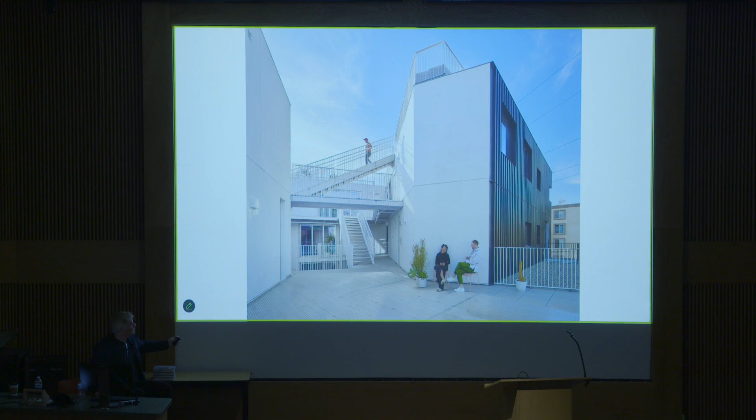The other thing is the interior is choreographed as well, with these overlays of walkways and stairs going up and down. So there's an energy there that's really working to a degree.

I'm very happy with this project. I think in the future, co-living will become more and more robust in terms of shared culture and the lack of amenities and resources people have. If you can live in an area where you have your own bedroom that you can close the door to, with a shared kitchen and living space—perhaps the younger generation will do that. When you get older, you may not want to. I'm not sure if I would do it, but I do think there's an opportunity, and there are certainly people open to the idea.

You have your privacy, thus the plan we did. You have a whole perimeter. Go to your room, and if you need to be yourself, close your door, you're there. You have your operable window, a desk, and your bed. If you want to go outside, you can hang out in the kitchen, or go up on the roof or other areas—you have those opportunities. I do think this is the future.

We're doing a co-living project right now in Detroit, and I believe we'll be doing more and more of them. So we're getting close to wrapping up.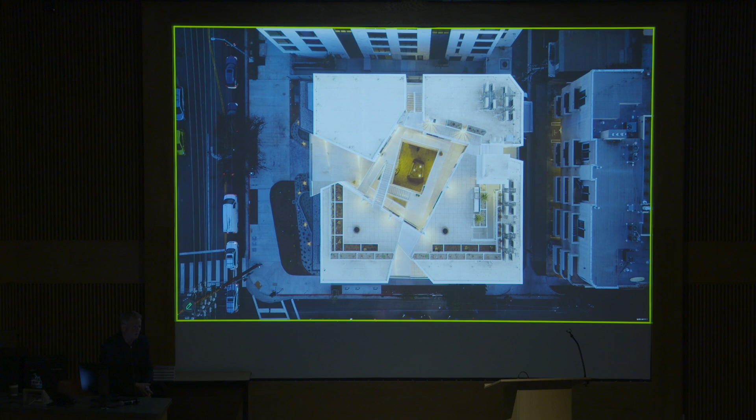I'm going to show you one last project which shows that all these ideas about social equity, the in-between spaces, and letting buildings evolve from how people use space can also be applied to other programs. We just completed the Sandi Simon Center for Dance at Chapman University—actually finished about 18 months ago. A very exciting project for us.

It is a transformation of a 1920s industrial packing house, the largest and last operated in Southern California—this was for packing oranges. It was in Orange County, named for the lots of orange groves that drove part of that region's economy. Those groves have mostly receded now, and oranges come from other places, but at one time this was the hot point of where you got oranges in Orange County.

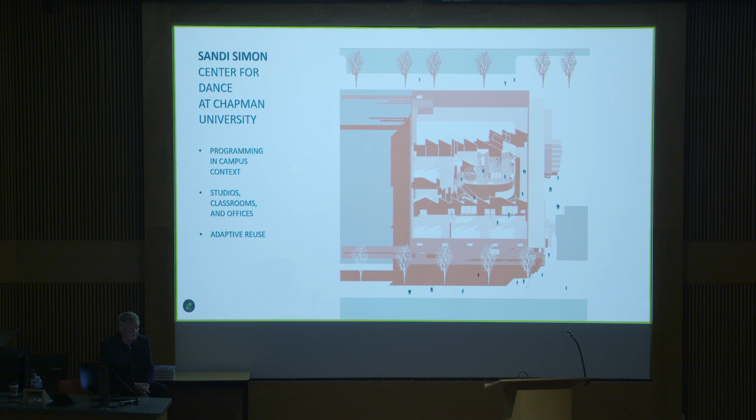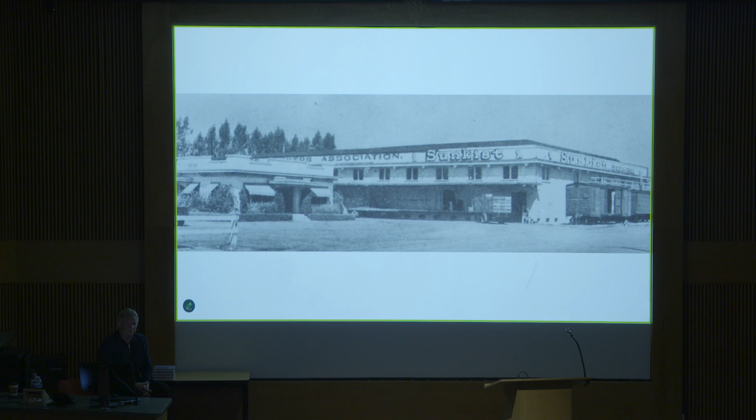The project adhered closely to historical preservation standards. This was a historical landmark building, as you can see here. That was part of the mandate when the university approached us—they wanted a dance school but needed the exterior kept as it was. That was fine with me. It was restored to its glory, and it's a wonderful space.

This was all very much embedded in the context and culture of where it was, which I really like—a great opportunity to work inside a building like this. It had some wonderful roof ideas that we kept. Here you can see the perimeter, and this is a 70,000 square foot project we did, with a sawtooth roof here.

The dance school we designed is in this space right here, with the entry right here. And here's the context of Orange County—not particularly interesting, frankly, but I'm really excited about this project.

The character was really important, and that was actually defining for this project—so the exterior was retained and rehabilitated. Interior-wise, we kept this main space but completely redid it, frankly. We love the roof, the sawtooth roof here with all the existing windows—we kept all of this.

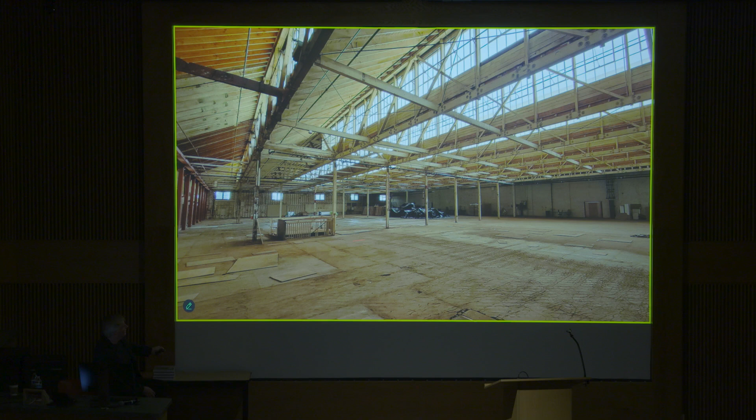The main thing was this: this floor plan represents 30,000 square feet, and we needed to double that square footage. So with that in mind, they then showed us this other space and said, here's the additional space we need.

How do we marry both levels and produce an architecture that is elevated and optimistic? That was our goal.

The basement was in deteriorated condition, underutilized, literally a storage space for 40 years, never used. So we were going to bring this back to life. We had to provide usable space within this space as well as in the main space above. So that portion was awfully challenging, but we saw an opportunity.

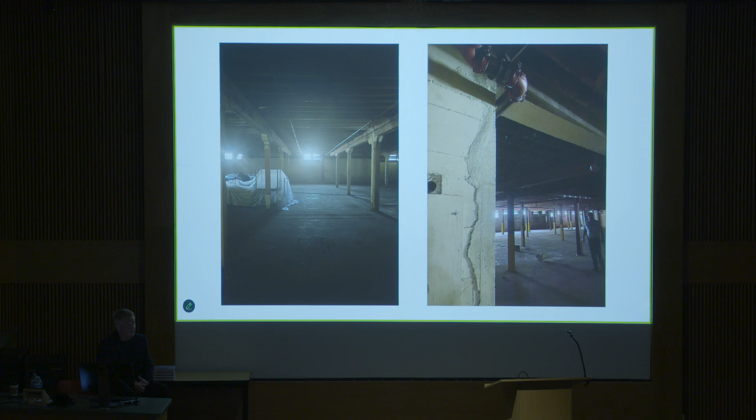Use things that are unexpected - that, in a way, elevates the design. Equally so there was a green plaza down here, so opening at the lower level, which is the dungeon, made sense, so we were able to provide that as well.

On the main level, we had 4 dance studios. On the mezzanine of the performance space, we had a classroom and also a hangout space for people who can have classes and actually have discussions outside with each other.

This project, again, was driven by the idea of in-between spaces. At the dance school, all the students would come in and it was basically a hallway, a 5-foot hallway. No place to hang out, no place to sit. So we made that the mandate of the project.

How can we create a dynamic and diverse set of programs? How can we provide a performance space and a social space for all the students? There were multiple users - students, faculty, visitors, audience. So it was a balance between all those programs, and also a balance between indoor and outdoor. We had all those aspects we were embracing.

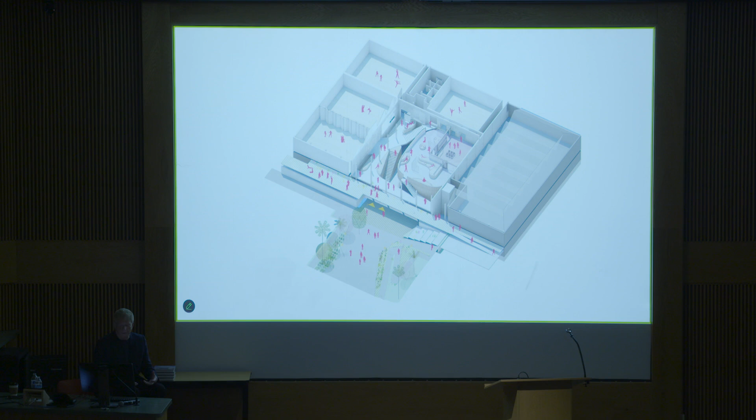The challenge of the project was how do we integrate that large floor above and integrate the level below, which had no light at all. Our solutions in the end are what led to this.

Here you can see the performance space, and you start to see down below. Here's a model we built that shows the circulation. The circulation had this fluidity to it, because when you're walking, you tend to walk in a kind of fluid way. Equally so dancers - the movement of dancers.

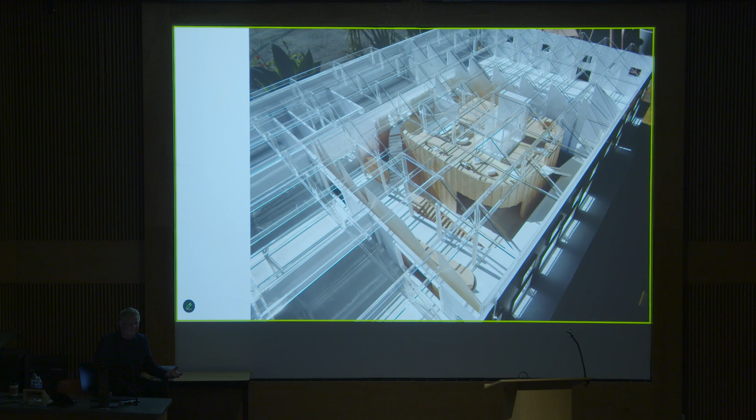Thinking about the users, why not make the circulation more fluid and dynamic, and have rational boxes for the studios, which was about working, about the production of dance. But the in-between spaces became much more fluid.

As you can see, the in-between spaces became the life of the space. The students really use them. The day this opened, they were really excited because they came from a very conventional, generic box with tiny studios, just hallways connecting them, no places to hang out. We gave them this opportunity to be able to hang out in between the studios.

We have a little detail we did on the performance space, which was the heart of the design. We took the sawtooth of the roof, and that informed the geometry and the way we treated the envelope, the building envelope, at the performance space. As you can see, it has that staggered sawtooth concept to it.

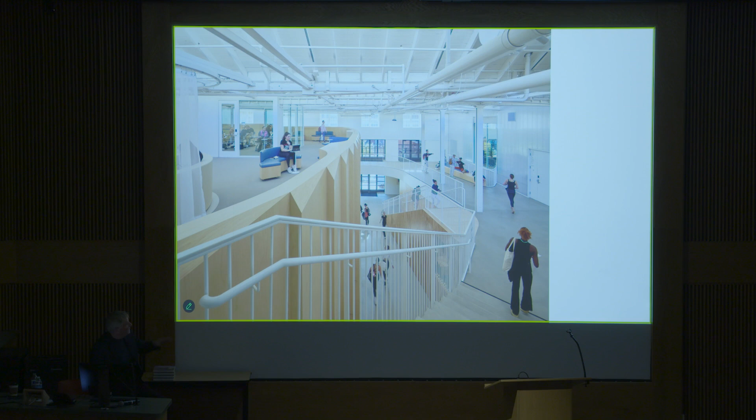There's a view up from the mezzanine, looking down to the main level and further down to what used to be the dungeon. As you can see, the light filters all the way down. We painted everything above white, so we kept everything.

What was nice is by pushing the performance space down at the main level, the lower level, we provided opportunities for the mezzanine, which they weren't expecting that additional square footage. So we provided them an extra 12,000 square feet just by making that move, and they were very happy about it. So we activated the roof.

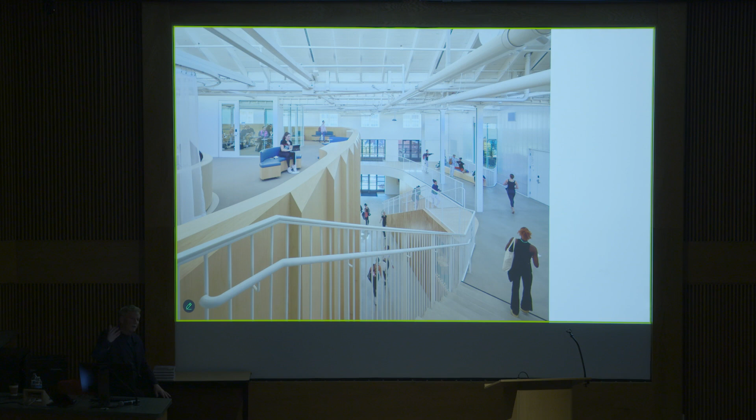And that goes back to our ideas in housing, where we always activated the roof. I always call it the fifth elevation. So we actually brought those ideas to this project. No matter what you do as an architect, whether it's a dance school, a housing project, a cultural project, or infrastructure, the same ideas can be applied to all of them. That's what's interesting as an architect: you have something important to you, and you bring it to all your different projects. There's looking into the studio, and of course hanging out in the in-between spaces.

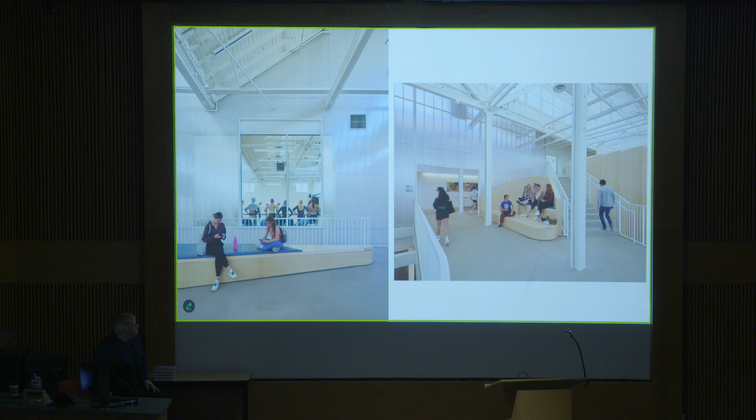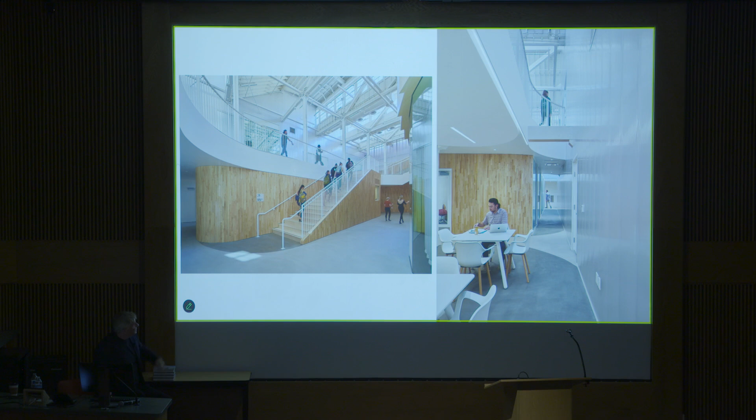And there's the recycled wood. That was the flooring on the main space that we tore out and reused for all the walls. But that space down here was that dungeon. As you can see, now it's not a dungeon. We put in a kitchen area and offices on this lower level.

But we wanted this feeling of optimism, this idea that they're coming here, they want to be here, they want to learn to be a dancer. That's important. Can you produce architecture or buildings which encourage and excite students to come? That's what I feel like we've done with this. They're really happy with this building, and they're really enjoying it right now. So I'm very happy and honored to have had this opportunity to provide these spaces for these students, which I think we do with our student housing as well.

So in closing, these ideas that underpin our work in housing can also be applied to dance schools and other projects. These are elements that I think all architects, over time, ask themselves: what's important to you? And bring that to your projects, and that will make your work unique. That's where you bring your artistry.